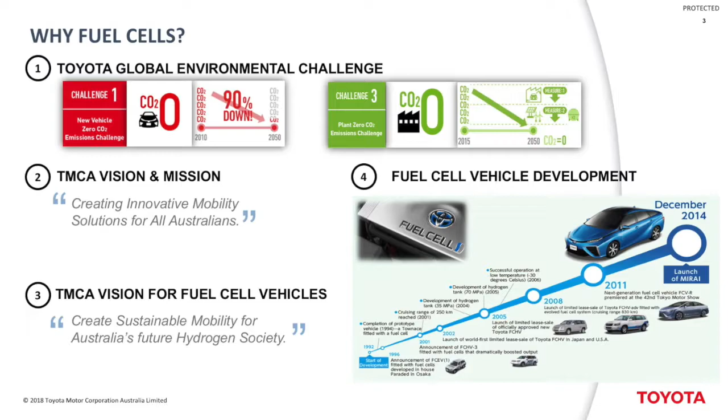With the driving forces behind our fuel cell adoption, when we talk about the hydrogen society, it's not only about transportation, but about energy and how hydrogen as an energy source can be utilized. We're also looking at global CO2 targets for vehicle emissions. Currently in Australia, we don't have any emissions targets as yet - we anticipate that will be coming - but global markets are already moving towards that, so zero emission and electrified vehicles are already part of competitive products in other markets.

I've already explained the 2050 challenge, but what are the advantages of hydrogen as a fuel? Basically, it offers zero emissions out of our vehicle - the vehicle we have outside only emits water. It has a short refueling time, taking roughly 3 to 5 minutes to refuel at a commercial station. It also offers long-range driving - in the case of our vehicle, it's been tested to do around 550 kilometers range. Obviously hydrogen's got a high energy density, and the other benefit is that you can manufacture it from various sources as well.

Our approach to all this focuses on industry and government - we want to promote the vehicles through these types of activities. When we look at fuel costs, our anticipation is that fuel costs need to be comparable to what we're currently paying for our vehicles, if not cheaper. Hydrogen should be green in the midterm, which aligns quite well with what was presented earlier by Dr. Finkel, because it explains how there's going to be a transition period for us to get to green hydrogen at some point. Stations also need to be near and convenient for users - like our petrol station network, it needs to be where people are used to refueling their vehicles, so you don't have range anxiety and issues like that.

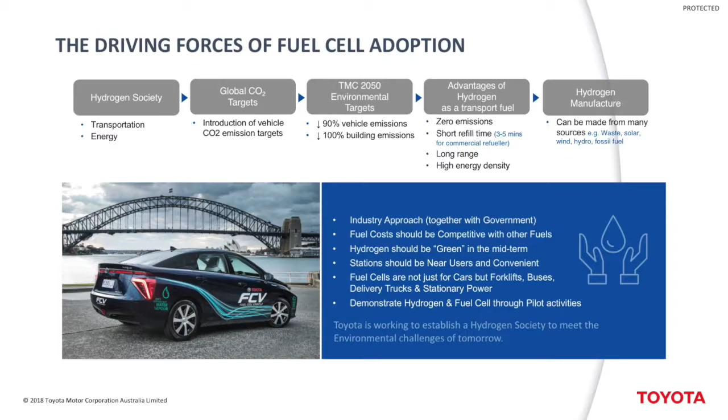In 2018, as has been highlighted here, there was a lot of activity in the hydrogen space. We had the COAG Energy Council, the CSIRO roadmap, the ARENA future export study, and again, the breakthrough was the CSIRO ammonia research with hydrogen storage with ammonia.

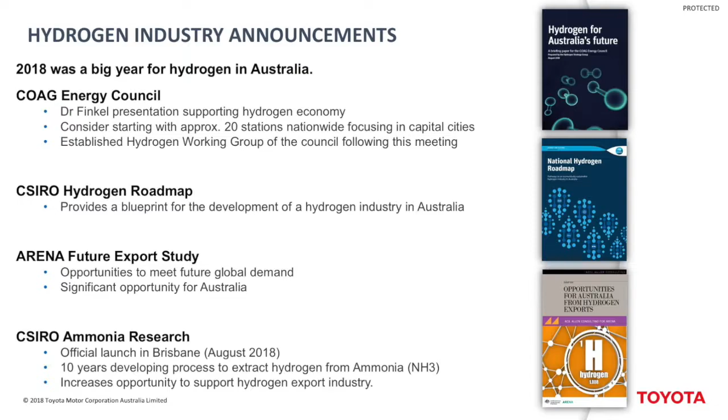So the Mirai is our fuel cell vehicle, and for those who don't know, Mirai actually stands for future in Japanese. We actually brought a car out to Australia in 2015 for a short period for a hydrogen conference. Since then, in 2016, we actually introduced 3 vehicles to be based here in Australia with the purpose of using it for engagement activities. As part of that, we needed to be able to refuel the vehicles, otherwise it'd be a pretty short drive.

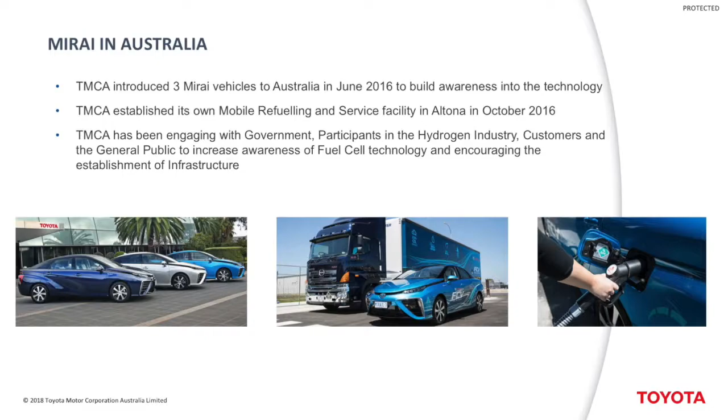So we actually developed our own mobile refueler and service bay as well, so we can sustain these vehicles whilst they're here. And we've actually used it to great advantage by taking the cars out and about, which I'll show you in the next slides. And again, the whole purpose about this is about engaging with government, participants in the hydrogen industry, customers, the general public as well. So we also try to go out to different public events as well to, again, bring the technology to the people so we can build that awareness.

So the marketing and engagement activities, this was an area that I'm directly involved with. We're not actually trying to sell the Mirai here in Australia, but we are trying to sell the vision and the technology and how fuel cell electric vehicles can benefit us here in Australia. So these are some of the images of our key activities that we've been doing. So we mentioned government, and we're trying to meet with all forms of government, whether it be federal, state, and local. Industry groups as well is a key area.

Fleet dealerships. So we do see an opportunity with fleets with fuel cell electric vehicles. Universities, schools and research institutes, which leads us into some STEM opportunities as well. So potentially having cars at different schools and so on hopefully inspires students to think that there might be some future opportunities in the job market in hydrogen fuel cell technologies. We've done some media activities as well, also with first responders to take the vehicles out to emergency services. And again, as I mentioned, general public.

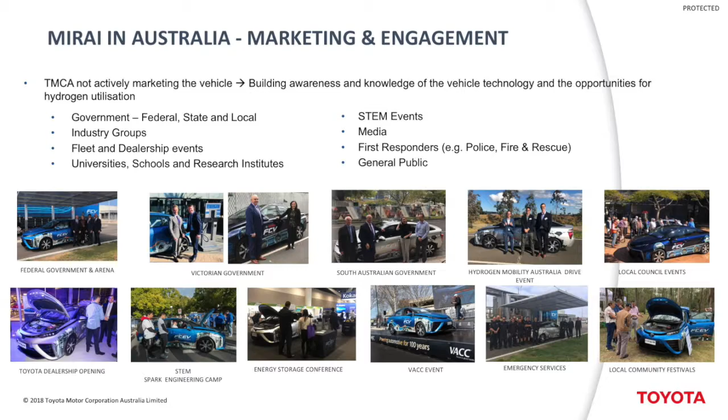So we've had cars this year. In fact, we took a car up to Gladstone at EcoFest as well. It's what we call grassroots events, where people can actually come up and have a look at the vehicle, ask the questions, and hopefully get some insights into how it works.

One of the activities that was really exciting to be part of has been the Mirai loan program. So as part of all the activities run with the 3 vehicles, we actually introduced another 10 vehicles to Australia. And the purpose of that was to actually have a loan program. So external people can actually loan the vehicles out, typically for 3 to 6 months, and they get the opportunity to drive the vehicles in real world conditions. So rather than just going for a drive around the block and telling us how quiet and how good the car is, you experience it in your own environment. And so far, it's been really positive. It's also about normalizing the technology.

It is the first Australian fuel cell electric vehicle trial to be initiated. At the moment, it's all been Melbourne-based. Obviously, the key challenges here have been refueling and even getting the vehicles imported to Australia with registrations and so on, because sometimes when trying to bring a car into Australia, the policies aren't actually written for some of these vehicles. So it's an iterative process as well.

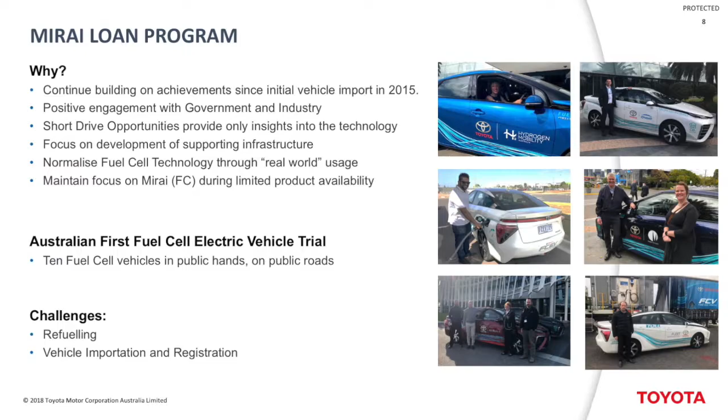From a current program status, these have been some of the participants so far within the program, who have utilized the vehicles to their own benefit as well. We're obviously continuing to look for new clients to be part of this program. Some of the key points for this is that it is a paid program that participants take part in. We basically offer them fortnightly refueling of the vehicles regardless of their fuel load. Again, it's mainly about making sure that people get to use the technology and drive it as normally as possible without having range anxiety and those sorts of issues.

We've traveled over 10,000 kilometers now with these vehicles, and it's continuing to increase. Again, social media has been a really key aspect with this activity, because a lot of the clients are using their own social media, whether it be Facebook, LinkedIn, or Twitter, or whatever it is, to actually promote their own activities. So inadvertently, it is a Toyota branded vehicle, but again, promoting fuel cell electric vehicles. And again, education and engagement is such an important part of this whole thing. I think the previous couple of presentations talked about education around safety. Again, it is about that and people understanding the technology as well.

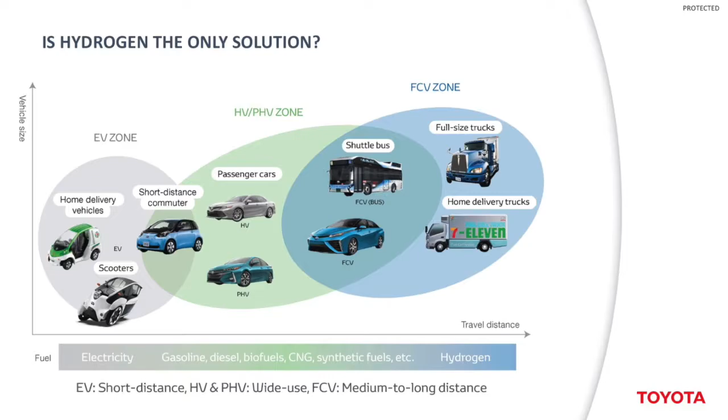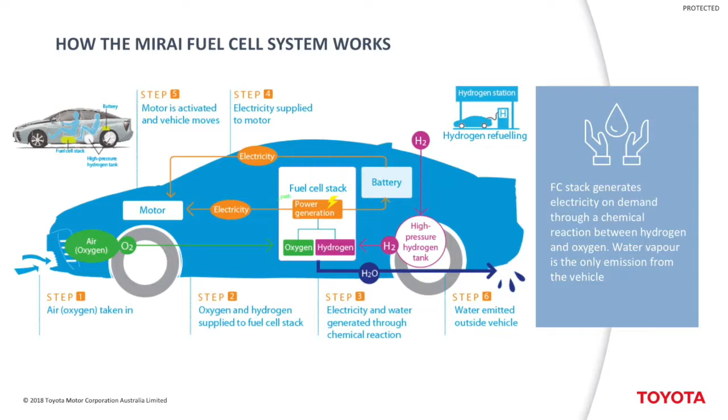So how does the vehicle work itself? So we actually refuel this car and store hydrogen on board the vehicle in 2 storage tanks. It's then fed to the fuel cell, which is located in the center of the vehicle. It then takes oxygen from the front of the vehicle, which is then pumped into the fuel cell as well to generate the electricity. So the only byproduct that comes out of it is the water.

So with refueling the vehicle as well, as I mentioned, we've got a mobile refueling station, but essentially it operates in the same manner as a normal petrol station, or an LPG, for instance. So it does have a receptacle which you connect to the vehicle. It actually has some enhanced safety features where it's got an infrared connection between the vehicle and the refueling station.

So basically the vehicle tells the refueling station the state the tank is in terms of pressure, temperature, and what fuel loads it's got in there. Once it's connected on there, it goes through a tightness check to ensure that the seal is 100% fitted, and only then will it start pumping hydrogen into the vehicle.

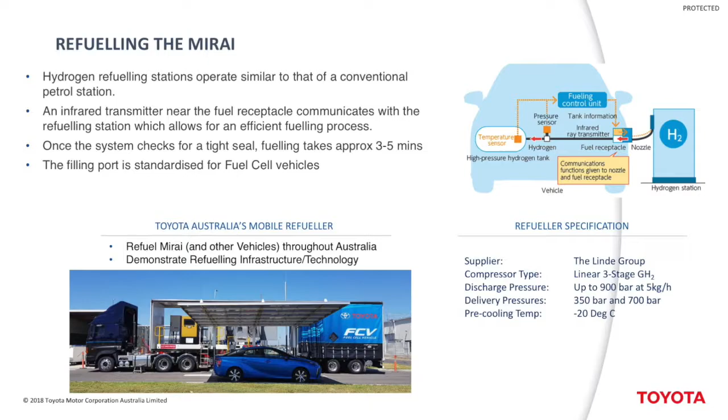That image down the bottom is of our mobile refueler, and it is on the back of a big diesel truck, so there is a bit of irony when we pull up with our truck, but it has given us the flexibility in taking vehicles and the infrastructure to various parts of Australia.

Now, some of the fuel cell initiatives of the Toyota Group have been in the commercial space, so we are actually seeing some of this technology moving into that area. Fuel cell technology is what we call scalable. So unlike a battery electric vehicle where power and range is basically dictated by the battery, with fuel cells it's almost decoupled. So if you want more power, you can increase the size of the fuel cell or double the fuel cell. If you want more range, similarly just increase the tank sizes.

So some of these vehicles that are being developed, the buses and trucks and so on, are utilizing the same technology out of the Mirai, but actually being scaled up. But we are seeing a lot more activity now with the buses and trucks.

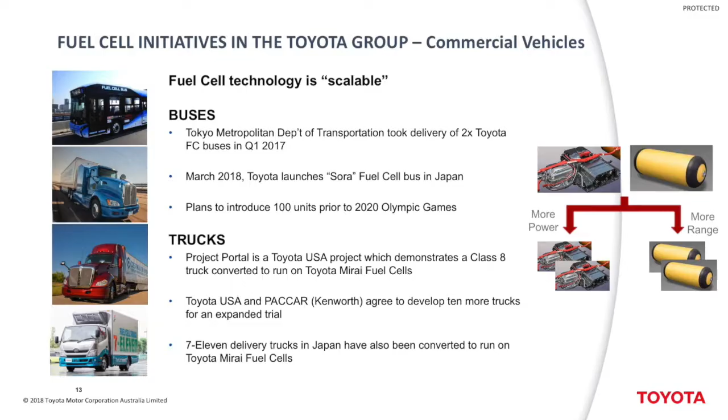I just want to talk about our project regarding some of the infrastructure initiatives that we're looking at. So when manufacturing finished at Altona, we went through a transition, and the whole site at Altona is actually turning into a center of excellence. And part of that center of excellence is the Hydrogen Center. We had a formal announcement about this center, and that was attended by the federal government and ARENA as well. And it got a lot of media attention as to what we are doing as part of this whole project. So what is the actual Hydrogen Center?

It's about developing a model of the hydrogen economy in Australia. So what we're planning to do is a demonstration activity to showcase how we can actually produce hydrogen on site. We want to be able to store it and be able to dispense it as well. As part of that, we're also developing an education center, or an experience center.

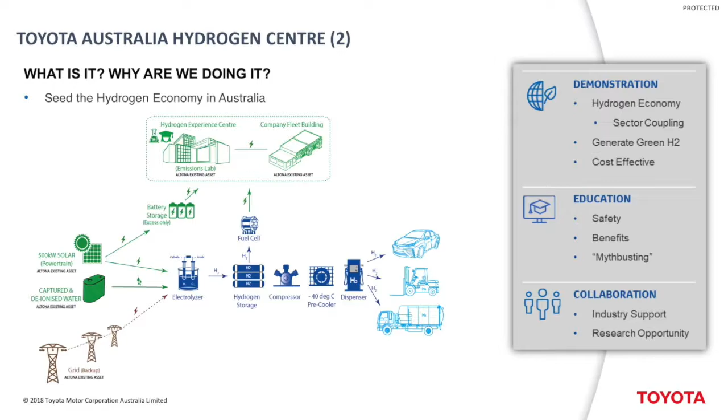So people that have very limited knowledge of hydrogen technologies can come through the center and get an interactive explanation as to how the technology works, what the benefits are, and hopefully even get an opportunity to drive the fuel cell vehicles on our test track that we have on site. And again, it is about collaboration with industry and other research opportunities.

Probably just want to finish there, but if it's not raining, please come out and have a look at the car close up, and if you have any other questions regarding the technology, feel free to come and see me. Thank you.